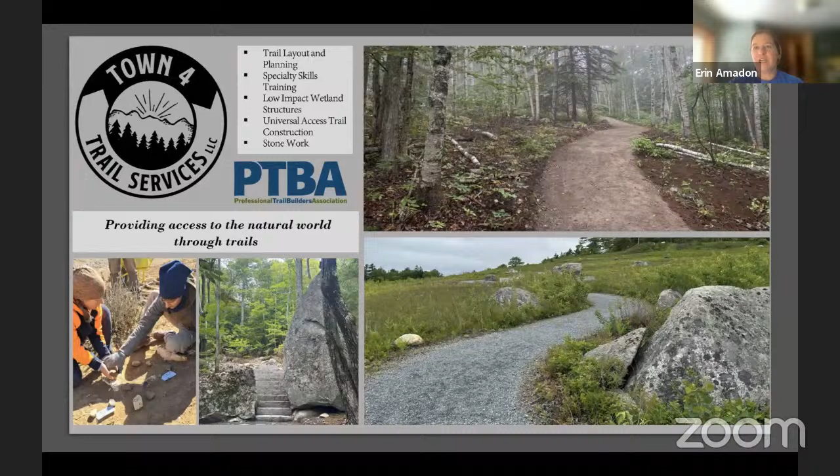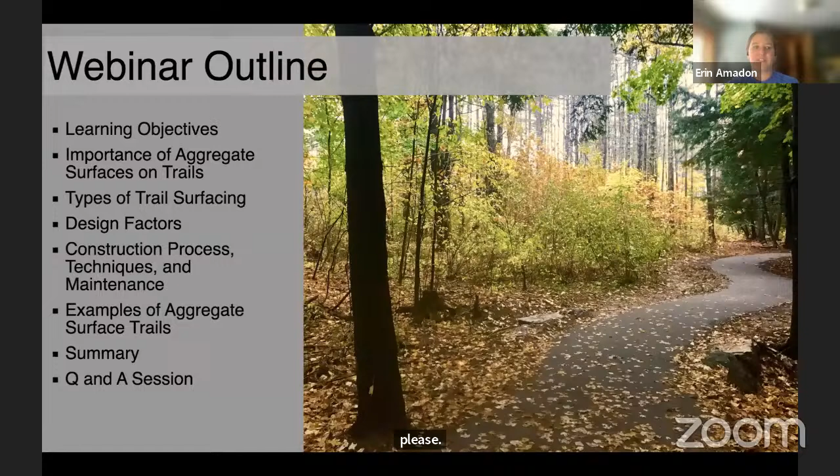Welcome everyone to our webinar on aggregate surface for trails. Today we'll explore the importance of these surfaces, the various types, key design factors, best practices for construction and maintenance. We'll also share some practical examples and wrap up with a question and answer session. There's a lot to cover, so I'm going to get started.

In this webinar, we'll look at different types of materials used for trail surfaces and their applications. We'll also talk about how things like slope, soil, and drainage matter when designing trails. Plus, we'll share tips for moving materials efficiently and explain why compaction is so important to ensure trail durability.

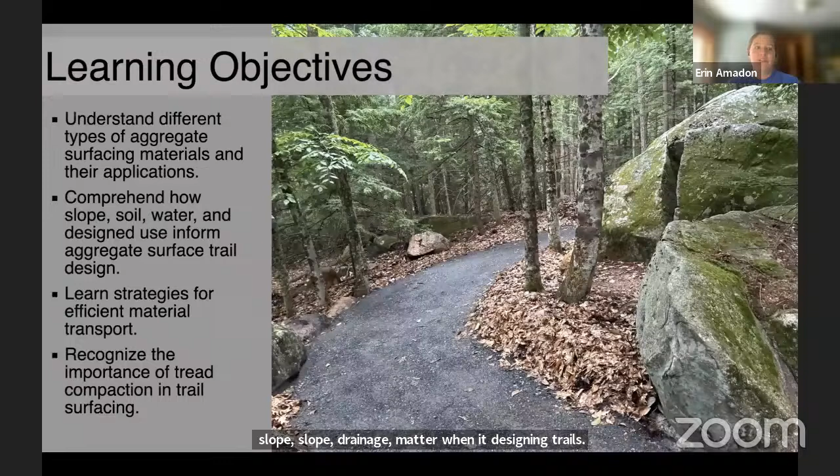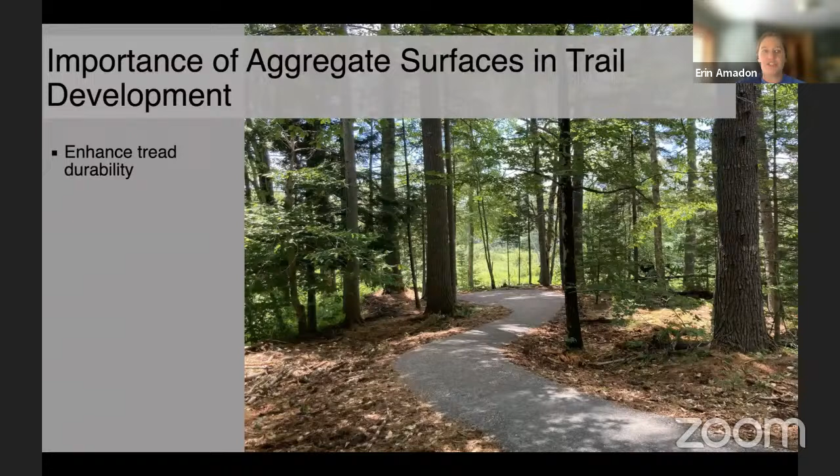So first, let's define what we mean by aggregate. Essentially, an aggregate refers to a granular material like sand, gravel, and crushed stone. These materials have a wide range of uses for trail construction. They can enhance tread durability by providing a firm and stable surface. They help resist erosion, reduce maintenance, and provide resilient surfaces that can reduce wear.

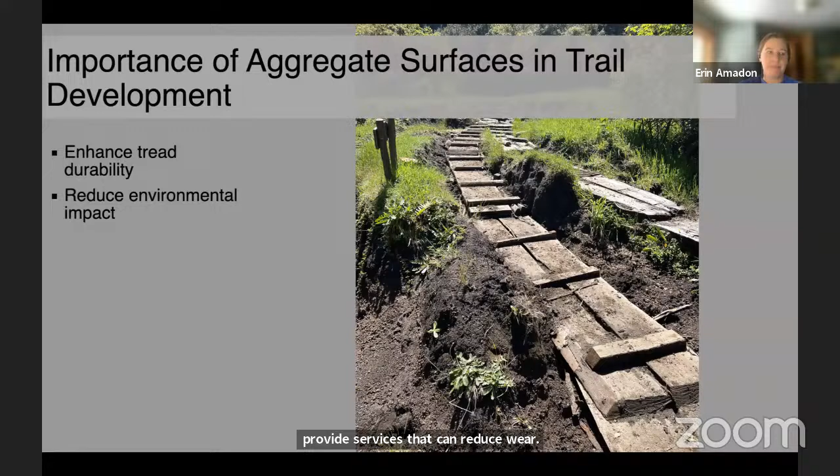They can reduce environmental impact by minimizing soil erosion, managing water runoff effectively, and preventing sedimentation. They can improve user experience by offering a smoother, more predictable path of travel, reducing tripping hazards, and providing a comfortable experience for users. Aggregate surfaces can play a critical role in creating a firm and stable surface to meet accessibility needs and standards.

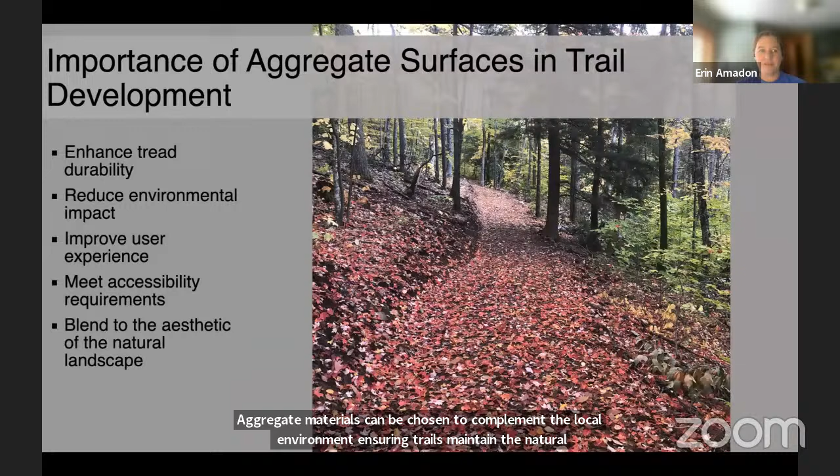Aggregate materials can be chosen to complement the local environment, ensuring trails maintain a natural appearance. You may be somewhat limited on coloration based on the parent material, availability, and pit locations, but typically you are sourcing that material as close to the job site as possible. If installed properly and with the appropriate sized aggregate, these trails can withstand diverse weather. These materials can allow for adequate drainage and resist formation of ruts, puddles, and mud. However, we should acknowledge there are some limitations to what they can withstand.

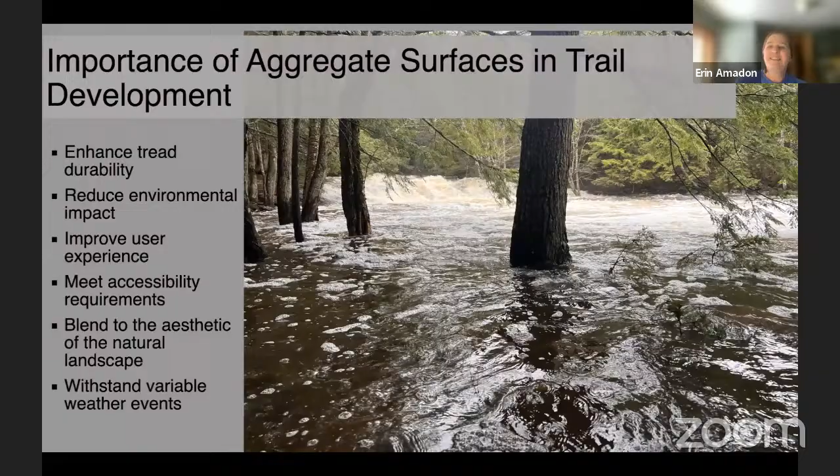Next slide, please. There are different types of aggregates used in general construction. Each type is used for a specific purpose depending on its properties and the need of the project.

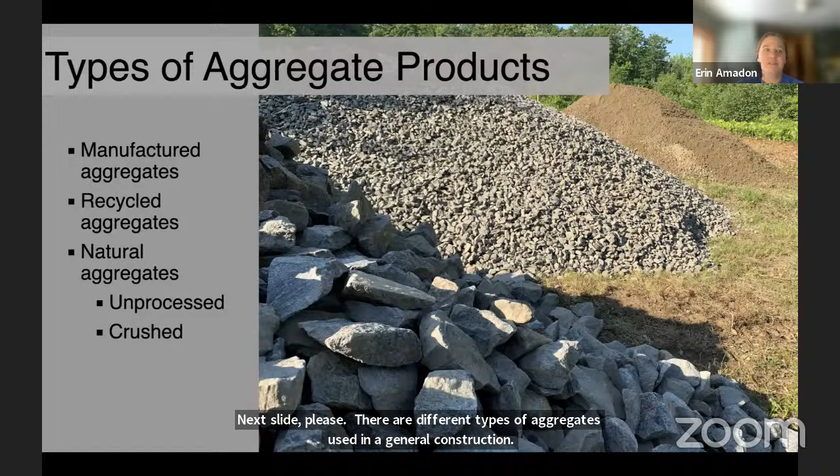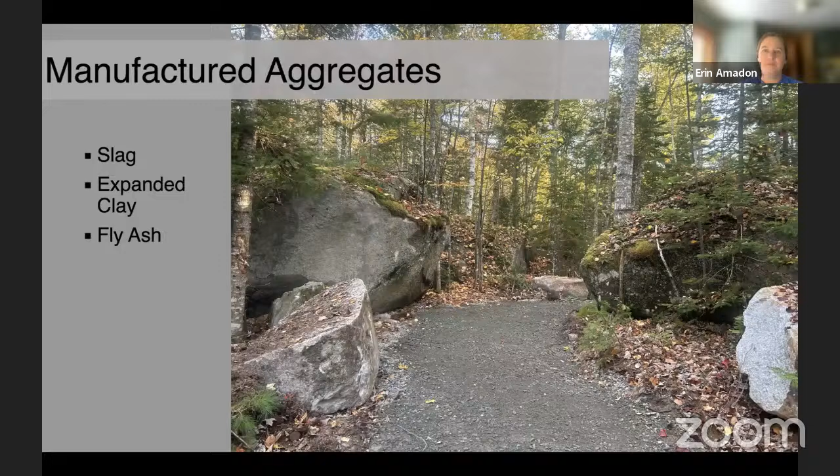We should mention that there are manufactured aggregates, because sometimes they're used in conjunction with other aggregates, but that's not going to be the main focus of our discussion today. There are also recycled aggregates out there, and using recycled aggregates can help minimize the environmental footprint by reducing raw material extraction and create a durable surface.

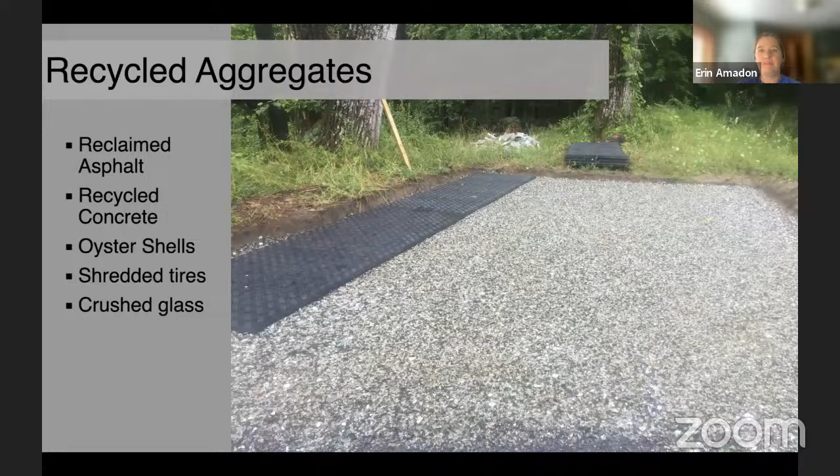Natural aggregates are unprocessed. They come straight from the earth without significant alteration. For example, you have bank run, which is a mix of sand, gravel, and stone, naturally deposited by rivers, often used as-is for foundational support. Sand is generally mixed in with other aggregates and is not typically used as a tread surface. River stone is known for its round edges and aesthetic appeal. It's often used in landscaping or for decorative finishes on the trail. Typically, we don't use it structurally.

Unscreened gravel has not been processed to separate by particle size. This type of gravel is often used as a basic fill for foundational layers where precise particle size is less critical. Screened gravel has been processed to separate particles, ensuring uniformity and consistency.

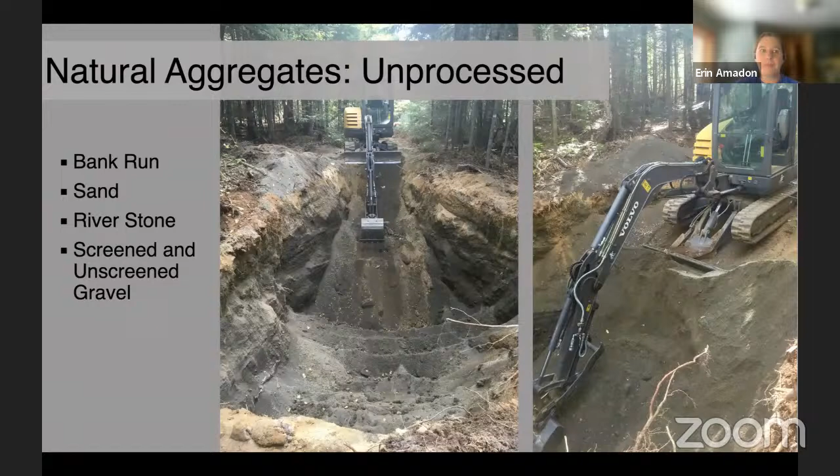Oftentimes, we'll take that unscreened gravel from a borrow pit and then transport it to our trail where needed. Typically this is done by 5-gallon bucket, dirt bags, or equipment. While this can be an essential part of a trail project, and sometimes cost-effective, it's not really going to be the primary focus of our discussion, but I wanted to make sure we mentioned it and acknowledged its use in trails.

All right, we're going to mainly focus on crushed aggregates. Crushed aggregates are made from larger stone or blasted from ledge that has been mechanically broken down into smaller angular pieces. The angular edges of the crushed aggregate lock together, and this can enhance its strength, resist movement, and help maintain durability over time. This is just a general list—every time you call a quarry, they're going to have a different name for the same product.

So to ensure that you're getting a consistent product and really getting what you want, you can ask for that gradation test report, or the sieve analysis. That sieve analysis is basically a method to determine the distribution of particle sizes in a sample of aggregate. The aggregate gets passed through a series of sieves with progressively smaller screen sizes, and the material that's retained is weighed and calculated to the percentages of the total sample it represents.

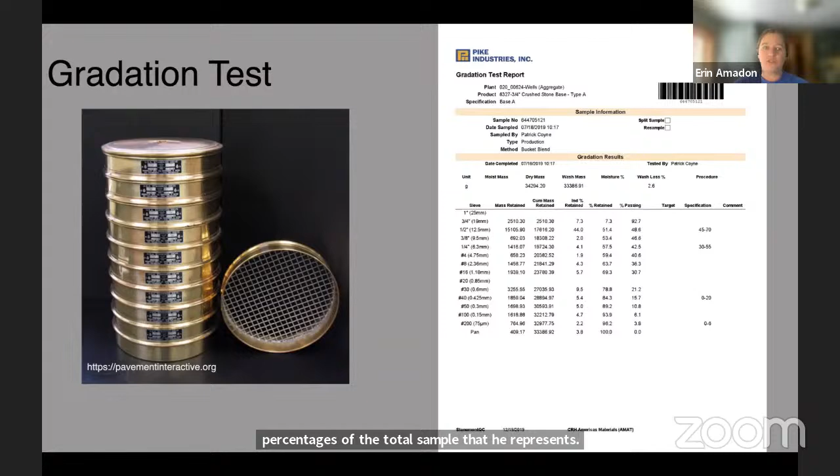When you order material from a quarry, you're either going to order it by the yard or the ton, and it's priced the same way, but it typically doesn't include trucking costs, so you want to take that into consideration.

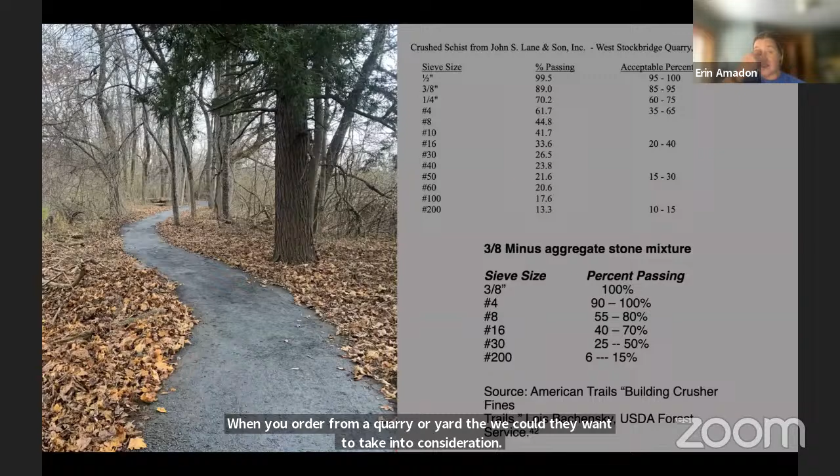Here are two different examples of sieve analysis that have worked well for accessible trail applications in the past, because they have the proper ratio of larger particle sizes to fines in order to achieve optimal compaction, stability, and surface drainage. When you're choosing an aggregate, it's important to consider things like its grading, durability, particle size, surface texture, abrasion and skid resistance, as well as absorption and surface moisture capacities.

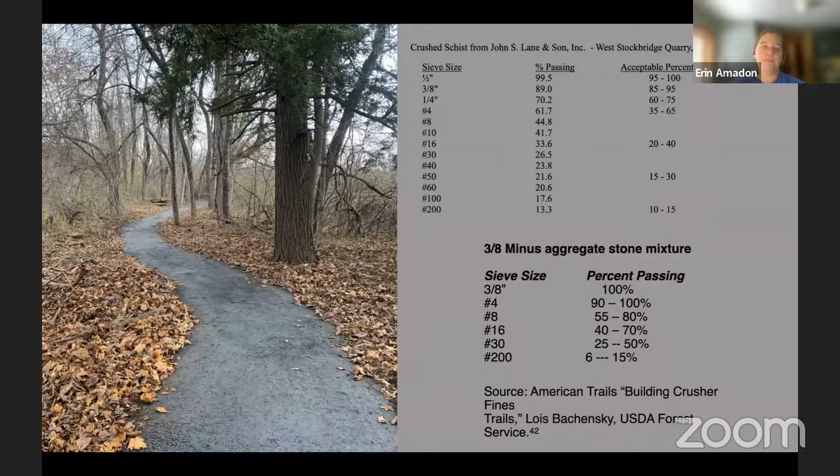Hold there for a second, Jen.

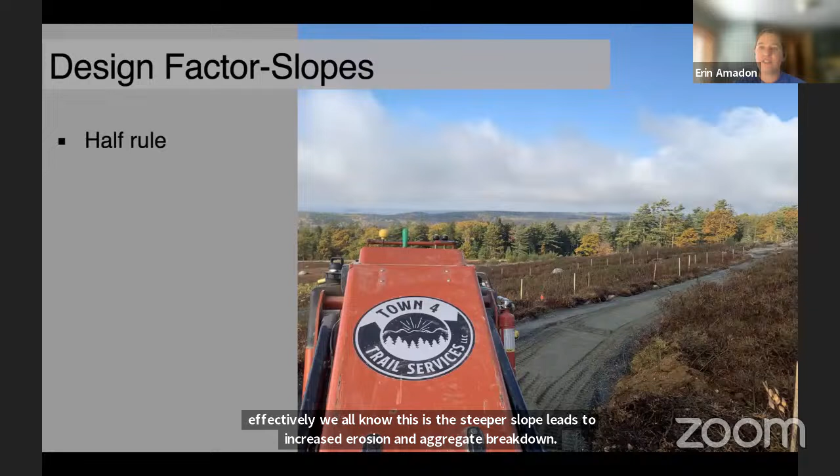One of the most important sustainable trail layout principles is how we address slope and grades to manage water effectively. We all know this, right? A steeper slope generally leads to increased erosion and aggregate breakdown, meaning that on a steeper slope, the aggregate surfacing material is more likely to be washed away due to increased water flow and force, requiring a design that better stabilizes the aggregate to help prevent erosion. Essentially, the steeper the slope, the more critical the design and quality of the aggregate surfacing becomes to maintain stability.

One of the ways that we can ensure we don't have too steep of a slope is by following that half rule in our design phase. This means that the trail grade should never be more than half the slope of the hillside. Another way we can look at that is thinking about trail slope alignment.

Thanks, Ted. So trail slope alignment can help us lead to a deeper understanding of how different slope alignments can affect trail durability and erosion.

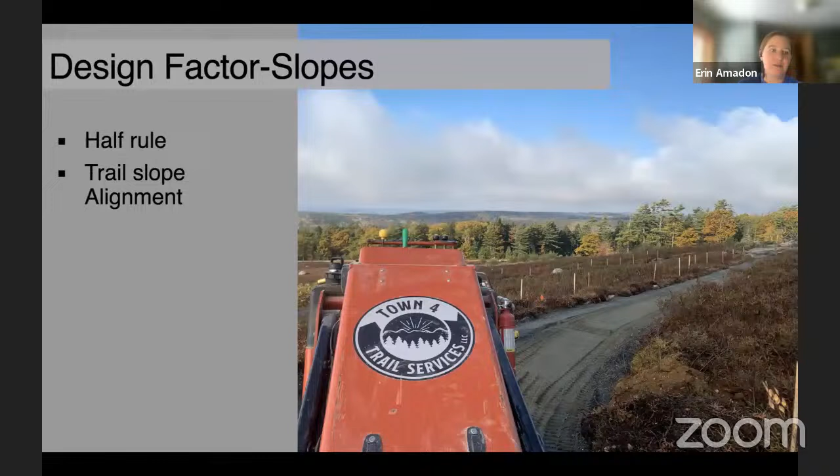Aggregate size and surface texture play a critical role in trail stability. Larger aggregate sizes are more resistant to erosion as they lock together better and stay in place. But smaller particles are more easily washed away by fast moving water. Additionally, the surface texture of the aggregate matters - rough textured particles create more friction, helping slow water down and reduce risk of erosion. But it's really that well-balanced mix of particle size and rough texture that can significantly enhance trail durability.

In areas with steeper slopes, aggregate surfacing can be used to stabilize the terrain and protect against erosion, often combined with other stabilization techniques though.

Mechanical wear happens from the interaction of how people use the trail and the trail surface itself. The more traffic, faster speeds, braking, turning, heavier surface to contact area, sudden grade changes, improper drainage, and wind a trail gets, the more wear and tear you'll see. Using an aggregate material can help reduce this mechanical wear.

Proper drainage structures - your grade reversals, grade dips, outsloping treadway, subterranean drainage - are all essential to help control water flow and prevent excessive erosion. Other design factors to keep in mind are things like your canopy cover; water dripping off of tree branches or kiosk roofs can add to wear and tear on the trail and should be considered when you're using an aggregate material.

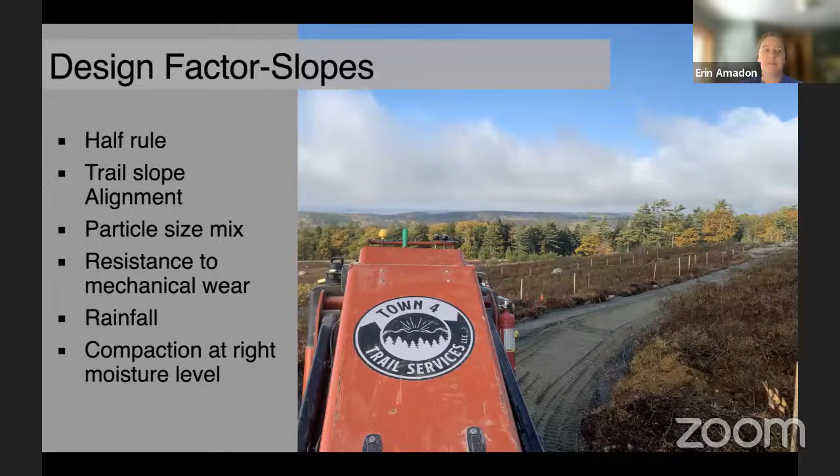All right, so soil conditions. First, it's important to note that I'm not a geotechnical engineer, but I am happy to share what I've picked up here and there with a lot of trial and error over 27 years of trail building experience. There is a lot of good information online about design loads, subgrade bearing capacity, load positioning for trails, and some of that information will be listed in the last slide.

Secondly, I wanted to give a shout out to the previous webinar, Basic Soil Mechanics for Trail Building with Alex Mann. Building off of that information, we're thinking about soil properties - things like texture and structure can really affect how well that aggregate sticks to the ground underneath. If the soil isn't stable or well structured, it can impact the overall stability of the trail. And so one of our considerations in soil conditions is that hillside hydrology, where that water table is and how that water moves through the landscape, are important factors into successful aggregate installation.

Properly accounting for your design load can ensure that the trail can handle the intended use without degrading too quickly. Design factors would include things like user, frequency, and other environmental conditions.

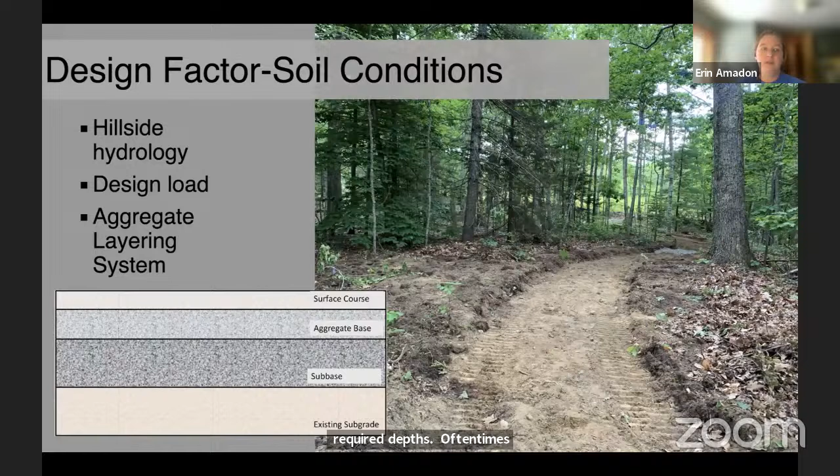So first and foremost, we want to maintain that natural drainage through our layout and design process.

And then we want to make sure that we're building a trail on a side slope to help maintain sheet flow, allowing water to move evenly across the surface. We also want to make sure that we are outsloping or crowning the tread to allow surface water to flow off the trail.

Most importantly is that subsurface drainage. It is key to maintaining the natural drainage of that hillside hydrology through the landscape. Oftentimes this can be done by a rock sandwich, a burrito, or a lasagna construction method. We like our food references in the trail world. A rock sandwich is usually sometimes fabric, depending on your sub base, then a 2-inch angular stone, compacted fabric, base, and then your surface course.

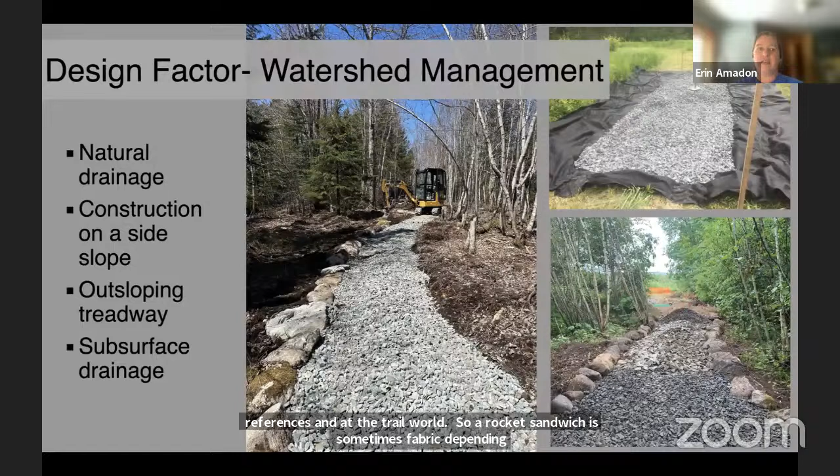The type of use on the aggregate trail has a big impact on its condition. For example, heavily used trails can experience more wear and more compaction, while foot traffic tends to be less of an impact. The more intense the use, the more frequent maintenance may be needed.

Aggregate materials, especially when properly compacted, help distribute the weight and reduce erosion, making them ideal for trails that see a lot of foot, bike, and horse traffic.

It's important to note that aggregate surfaces can be significantly affected by seasonal conditions, such as weather including rain and freeze-thaw cycles. High temperatures can alter the material's stability and durability. However, using aggregate surfacing can still be beneficial due to its cost effectiveness, ability to manage water, and flexibility in various climates.

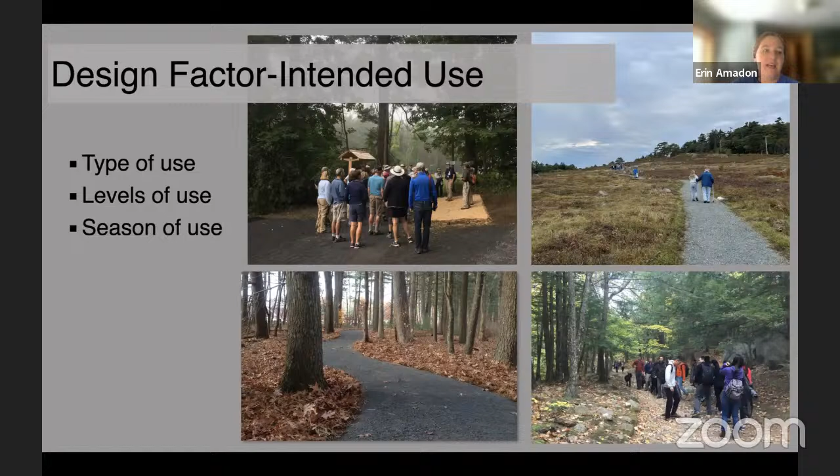And then last but not least, before I hand it over to Jed, linear grades and cross slopes are still important factors to ensure proper drainage and trail stability, which we mentioned earlier.

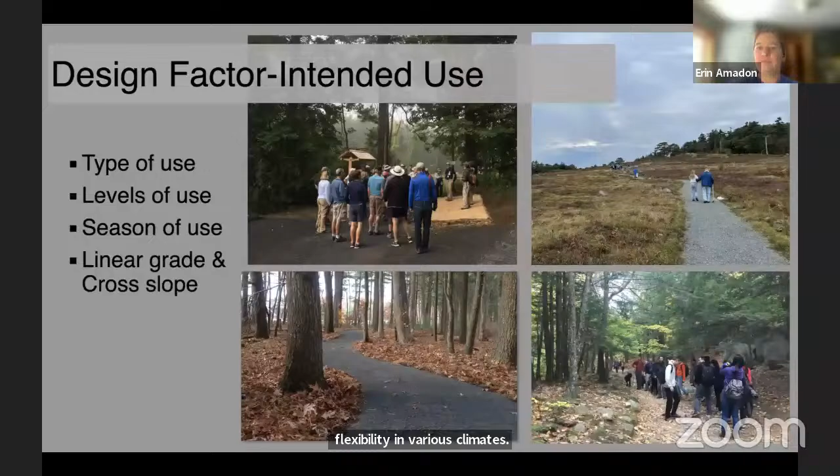All right, thanks Erin. I'm going to talk for the next 20 or so slides about the construction process. The idea is by presenting the proper techniques and showing the construction sequence of a typical multi-use aggregate surface trail, a lot of the questions about what to do and what not to do will kind of be covered.

So, equipment. Although it's possible to build aggregate surface trails with simply an ATV and a dump trailer, having the most appropriate equipment makes a huge difference. We generally use track machines that are no wider than the finished tread, and sometimes considerably narrower, except for some occasional compactors and wheeled loaders.

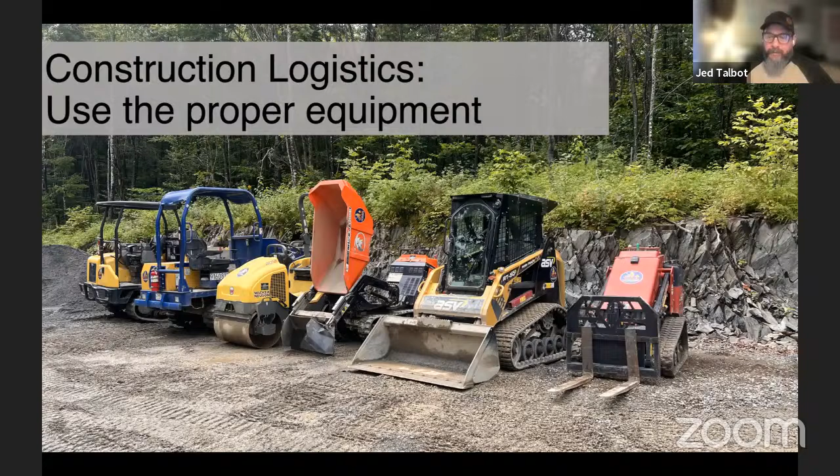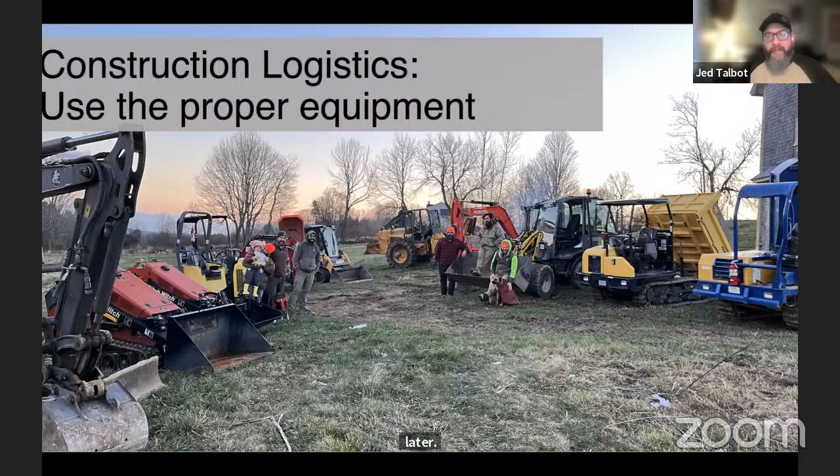Without going too deeply into the specifics, because this isn't really a mechanized webinar, we use mini skid steers for grading, larger skid steers for loading, tracked carriers of various sizes for hauling and dumping, getting that stuff way back out into the woods sometimes, and drum and plate rollers for compacting. We'll talk about those more a little later. We also use excavators for, believe it or not, excavating. It's not uncommon to have as many machines on a project as we have members, or dogs or kids.

So the construction process. First thing we do - I'm going to skip over the design and layout elements for the sake of time, and assume that the trail has been marked out according to some of the design guidelines that Aaron was outlining earlier. The first step is to prepare the trail bed.

Do that by clearing the corridor and removing as much vegetation as possible prior to the excavation. We usually blow or rake the leaf litter outside of the excavation zone, and pile it or windrow it neatly so that we can reuse it again in the soil stabilization and naturalization phase, one of the last things we do before finishing a trail.

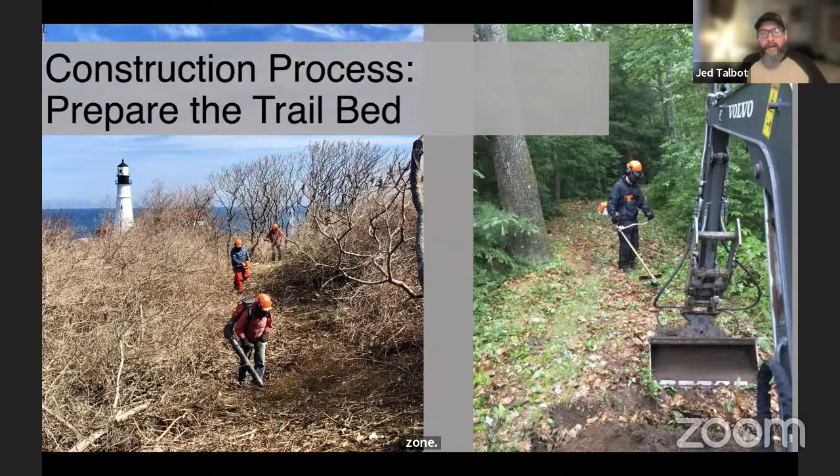Sometimes when we're building through fields or areas with a solid vegetative root mat, we'll use a power box rake, often referred to as a Harley rake, to masticate the soil and churn it up into a nice loamy mix. That makes everything a lot cleaner, keeps the seed source in the organics on the edges of the trail. You can also use a rototiller, but we find that a power box rake works really well.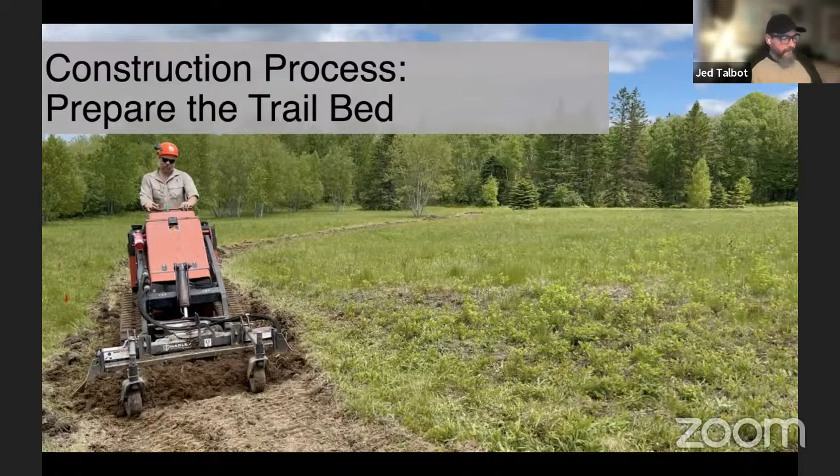Then we start the excavation process, where we excavate to the depth of the finished trail tread and remove the organics as neatly as possible, paying close attention to a bunch of things, like looking at grades and the final elevation of the trail.

Sometimes people will put grade stakes with elevations on them during this process or directly after. We're looking at the depth of excavation, where the organic layer meets the mineral soil layer, and also hydrology.

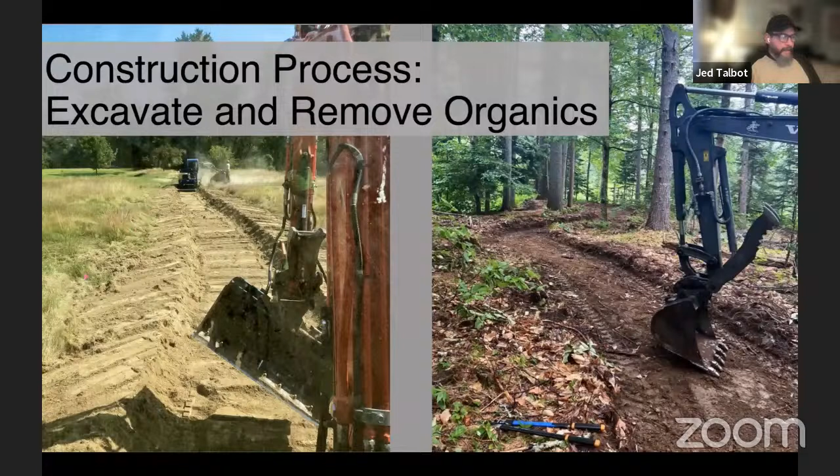We should be thinking about how the tread will shed water, generally either crowned, insloped, or outsloped, and visualize where the water is going to go and how we'll be moving it as it comes onto the trail bed and as it exits during the excavation process. You really want to wrap your head around how you're going to manage the water as you're excavating the trail, and that continues throughout the rest of the processes.

Generally, we try to utilize every stick, leaf, and blade of grass. Everything's a resource, and we use it as much as possible.

But sometimes there's an excess of excavated organic material, rocks, or, really commonly for us in the Northeast, rocks and stumps. We're digging up way more of those than we can reuse. They're a little unsightly, so we don't just throw them off to the side, generally speaking, but we haul them out of the immediate view shed of the trail. Sometimes they're dispersed or piled on site, and sometimes they end up getting hauled off. It does take a considerable amount of time to remove the organic material from the trail bed, but it's not a step that we forego.

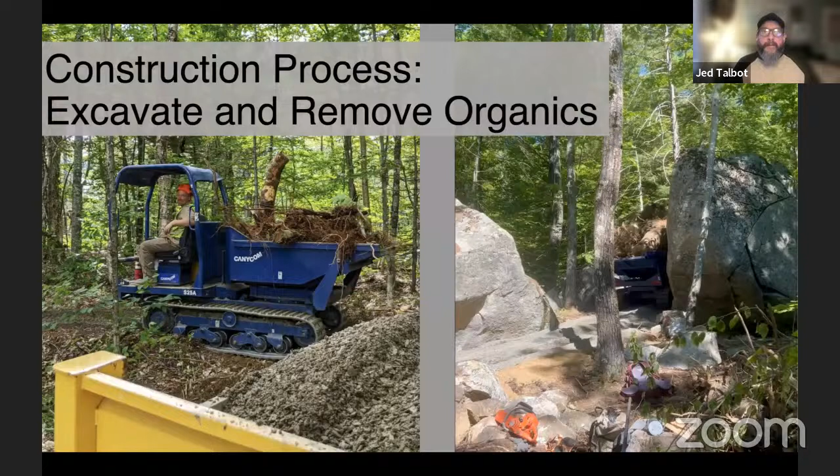Then we start to analyze and construct our water relief structures. Water relief structures include rolling grade dips, grade reversals, culverts, boardwalks, swales, etc. They should all be planned out while you're excavating the tread. The variety of water relief structures is considerable and varies according to the type of trail and the user.

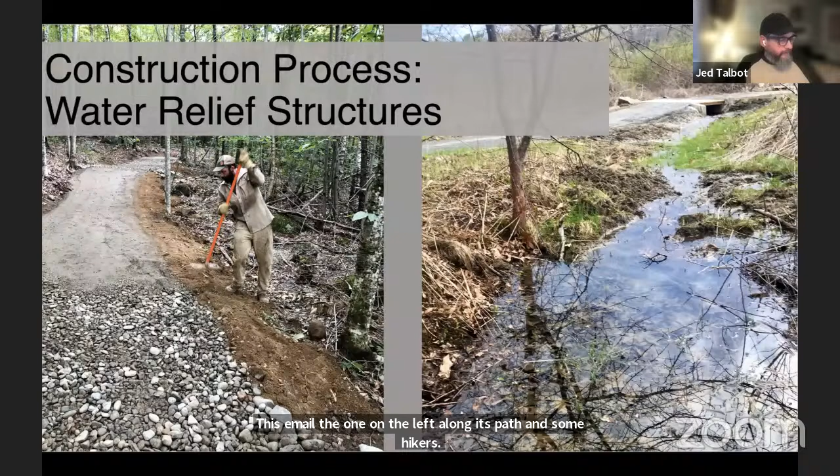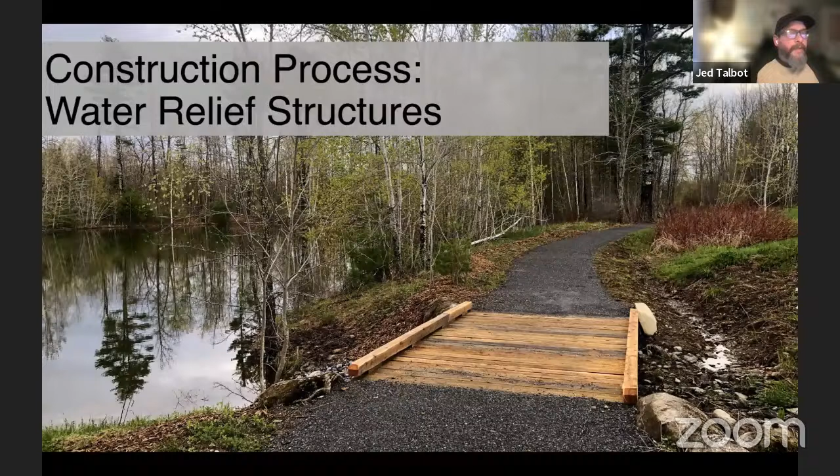So this is the type of stuff we really want to consider before we actually start throwing gravel on the ground. We also utilize traditional double wall plastic culverts at times.

When we do, it's important to sculpt the inlet and the outlet to channel water to the culvert with off-trail ditches and swales, and slow the water down after it leaves the culvert, either with riprap, large woody debris, or level spreader sediment pools. There's a number of ways to slow that water down after it leaves your culvert.

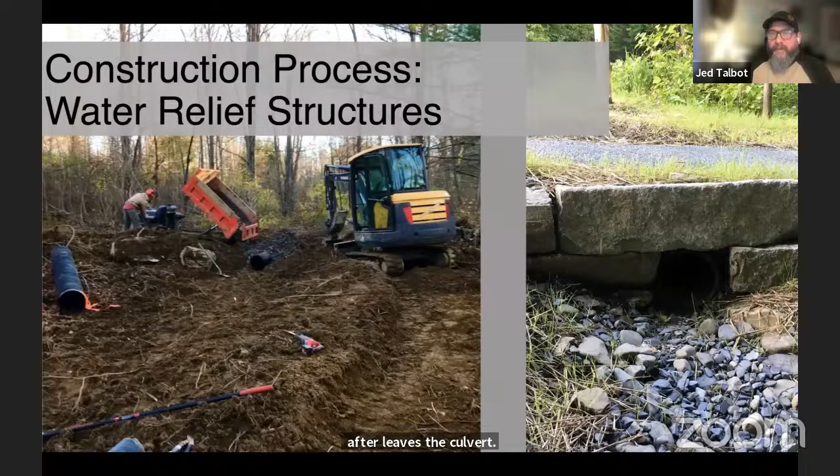The wing walls around the culvert should be retained with rock or timber, and a cap should be placed over the culvert with a minimum of 12 inches of cover. We like to hide our culverts from view with well-placed stones for aesthetic reasons. It's not necessarily functional, but I personally appreciate hiding those plastic culverts as much as possible on a trail.

Then we have to identify and fill the sub-base areas. The sub-base, like Aaron was talking about on a previous slide, I'm loosely calling sub-base, referring to drainage stone, whether it's crushed or screened, that allows water to pass through the trail. So we often use 1.5 inch stone, which is what you see in the photos here. But sometimes it's 3/4 inch rock, and sometimes larger aggregate. Sometimes we'll have 3 or 4 or 5 different sizes of aggregate that we're using in different places, depending on the need.

If subbase is being installed over saturated soils, we should put geotextile fabric down underneath that stone. Fabric is always placed on top of the stone. We'll talk about that a little bit more in a minute. Aaron referred to that as a rock sandwich.

Exactly where and when to install subbase, where it's needed and where you don't need it, is kind of difficult to generalize. But as a point, we always install a subbase of drainage stone anywhere there's exposed ledge or bedrock, because groundwater generally percolates until it comes down and hits that ledge, and then it moves on top of that ledge. If you're excavating your trail down to the ledge, the water will easily wash out gravel really quickly if you don't give it a way to pass underneath your trail.

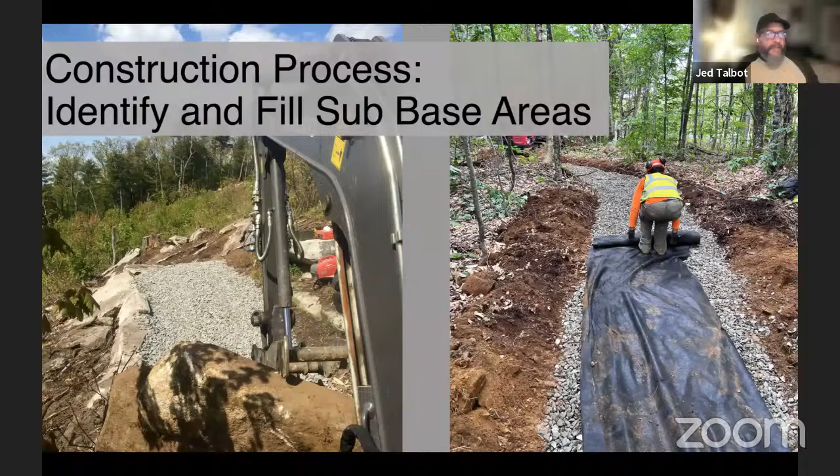So in terms of geotextile fabric, we use geotextiles between our subbase and our base layers. We don't often use them between our base and our surfacing layer, but sometimes there's a reason to. We prefer to use for trails a non-woven fabric, which means it's perforated, like needle punched, not like the plastic type you see on roads. It resembles felt, and we usually use the 4-ounce weight.

The manufacturer that we prefer to use, or the standard we like to use, is Mirafi 140N, or equivalent. That's the specification we like.

Geotextiles are really important because they serve 3 main functions: they act as a filter, a separator, and a stabilizer. As a filter, it allows water to pass through but not sediment - really important. As a separator, it keeps soil and aggregate of different types from mixing. If your subbase drainage stone is getting clogged with fines, it will cease to function, so it's really important. As a stabilizer, it gives more structural integrity to the soils and surrounding aggregates around it.

One thing we don't often talk about with geotextile fabric is that it also serves, to a degree, as a weed barrier. That can be really important when you're building trails through fields, like the environment we're seeing in this photo. But enough about geotextiles for a minute, let's talk about filling our trails.

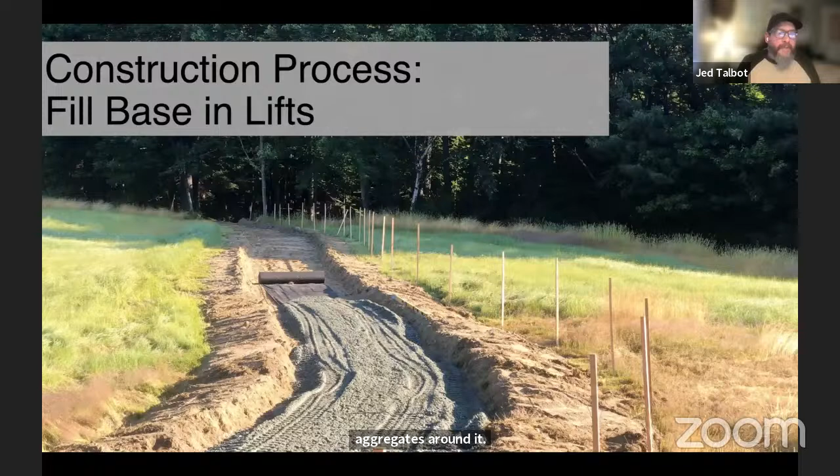We fill our aggregate surface trails, our base, in lifts or layers. So in order to achieve adequate compaction rates, we want the thickness of each layer before we compact to be about 4 to 6 inches.

You don't want to fill the entire depth at once because you won't be able to get those bottom few inches compact enough so that they won't settle down over time. And a question we get a lot, and it's a really important one, is how thick or deep do we want our aggregate surface trails to be?

Personally, I often see projects where you're seeing the absolute minimum - 2, 3, 5, 6 inches of aggregate on an aggregate surface trail - and they generally need maintenance within a few years. You start to see that fabric popping up through as things move.

So we generally shoot for a minimum of 8 to 12 inches of thickness total, between your base and your surfacing layers - that's excluding your subbase. And we often exceed that; we're often at 14 to 16 inches. A lot of that depends on the depth of your organic soil, and how much you need to build up to get proper drainage given the terrain restrictions that you have.

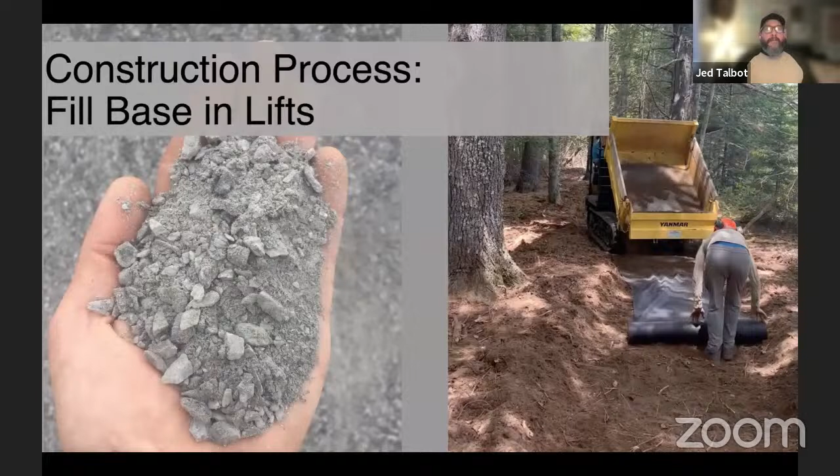We sometimes also use heavier plate compactors that have forward and reverse motion.

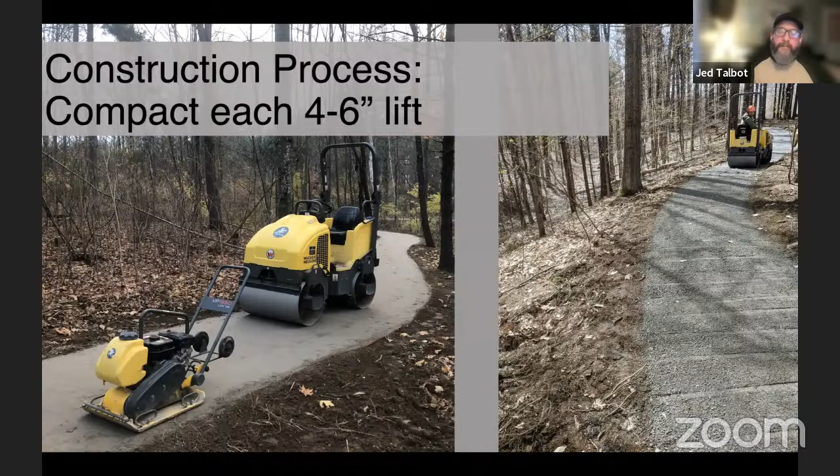Particularly with your final compaction, but also with each tier you compact, moisture is essential. Water creates that ionic charge that attracts particles together. It's essential to have stuff stick, and you need it to stick together instead of displacing in order to achieve your compaction rates. So that can be tricky sometimes.

We often end up leaving a compactor or two on site even after we demobilize from a project, so that we wait until those nice soaking gentle rainstorms happen, and go compact after that.

As Aaron alluded to, you don't want to compact when it's too wet either. If you're using a plate compactor and you're starting to see the surface turn into mud, or stuff starting to bubble up, it's too wet to compact, and you're also doing yourself a disservice. So you want to try to hit that sweet spot.

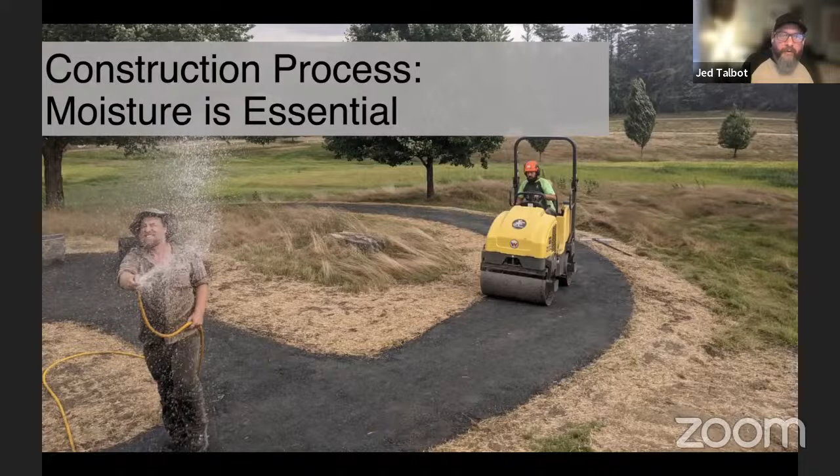And sometimes nature's not conducive to our construction deadlines, so we have to augment with water that we bring in. This picture actually, we were pumping water from a nearby pond and bringing it in, putting it in a vehicle, and adding water that way in order to get our compaction rates to what we needed to be.

So our top coat, or our surfacing layer, as Aaron labeled it earlier in the slide, is the next thing that we add if needed. We generally install a top coat of a slightly different aggregate when we're building accessible trails.

We have some specific recipes that we prefer to use for accessible trails that work really well, but that changes with where you are geographically and what you have access to in terms of quarries and how far you can truck stuff. So I'm not going to make any specific claims of exactly what should be used or what shouldn't, but your top coat is the last thing to go on if you're doing an accessible trail.

Usually that top coat wants to be 2 to 4 inches thick, and that's a really good thickness. You can go a little heavier, you can go a little lighter, but usually we shoot for that 2 to 4 inches of thickness for our top coat. And again, just a nice shot of needing the moisture to compact.

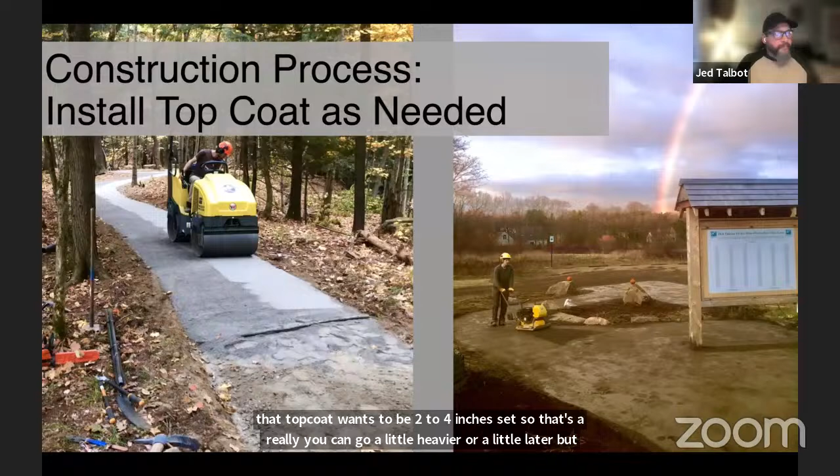Next, we finish our edges and we naturalize. This is a step that is very time and labor consuming, and adds to the cost of a trail significantly, but it's critical to not only aesthetics, but the function of how a trail works. Just throwing gravel on the ground is not going to allow water to move across it the way we need it to. So what we do is we hand finish the edges when we naturalize.

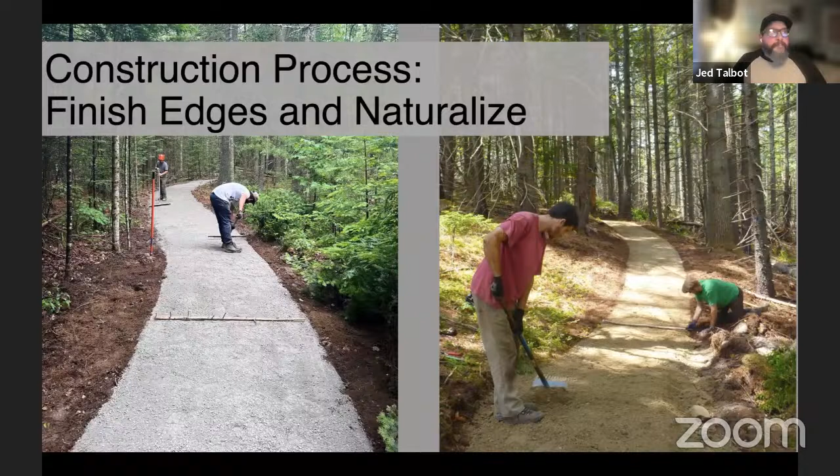We stabilize our soils, sometimes seeding and mulching. We don't always have to seed and mulch, depending on where we are, and some clients don't want to import any seed source at all. Sometimes there's plenty of seed source in the excavated organic material on the edges. But as needed, we stabilize our soils, we seed, we mulch. Basically, anything that we disturb, we stabilize, and we try to stabilize that day, if not that day, certainly before any rain events.

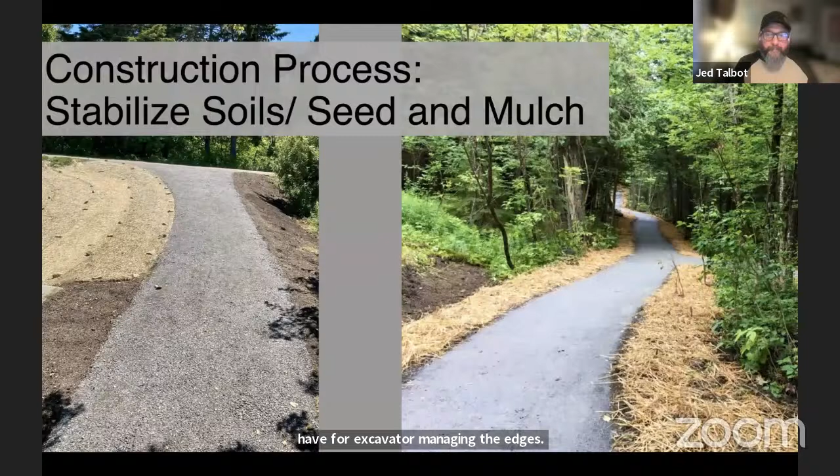So that's it for the construction piece. We'll get into a little bit of some of the more common maintenance issues and things you can plan on if you're going to construct an aggregate trail.

Thanks, Jed. I think a lot of times there's this illusion that aggregate surface trails don't need maintenance, but that's just an illusion. They do require maintenance, and we're going to go through a couple of slides that show typical things we see on a trail. The main one is clearing and cleaning, which involves removing debris, fallen branches, and some of that leaf litter.

Do be careful when you use a leaf blower, because you don't want to remove all those fines. Essentially you can just turn on the leaf blower, no throttle needed, and let those leaves get blown off the trail without removing any fines. You don't want to do it when the trail's too dry, and be careful that you don't create a berm along the edge of the trail when you leaf blow and clean it.

Next slide please, Jed. So this is the same trail - the picture on the left is just after construction, and the picture on the right is a year later. It just shows how much vegetation can grow into the trail.

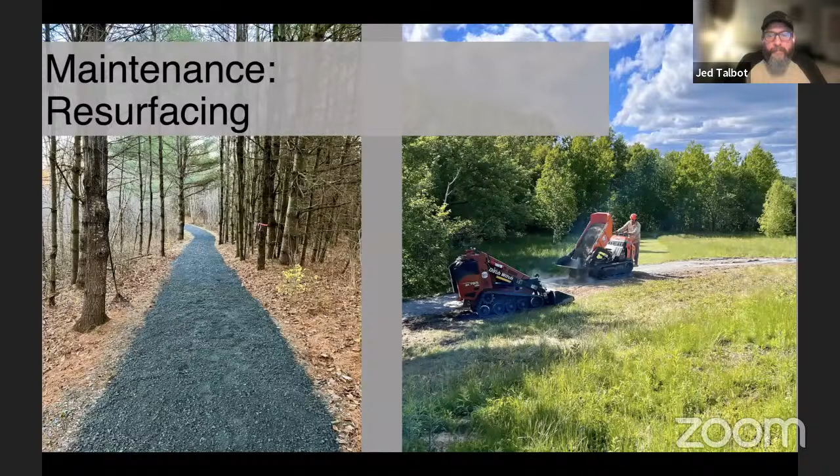And then before compacting, with compacting that went really quickly also. As much as we would love to say we build trails perfectly the first time and analyze the drainage and watersheds exactly the way we anticipated, you're going to probably have to go back and do some stuff.

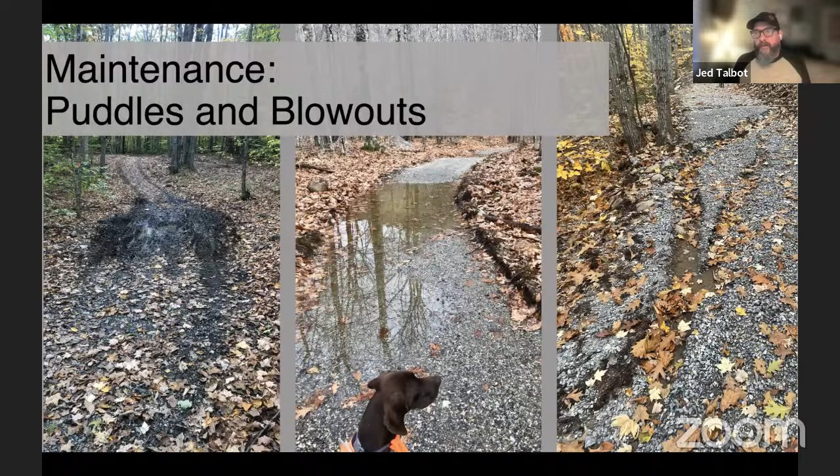Sometimes that involves modification and retrofitting, like adding box culverts. This is an example of a trail where we built it and then they changed the parking lot, so after we left, the parking lot started shedding water and we had to get the water across the trail. It was a new influx. The same thing can happen with harvesting or logging operations after you construct a trail. Hydrology is dynamic, it moves, things change. Water changes the way it moves across the landscape pretty frequently.

So now we've got a little bit of time. How are we doing, Aaryn? We've got a few examples of aggregate surface trails, we can just gloss over them really quickly to get to a Q&A. Yeah, that'd be great, there's a lot of questions. Okay, we have 12 minutes left. All right, well how about we just go through photos and mention the projects really quickly, and then get to questions, 10 minutes of questions? Perfect, okay.

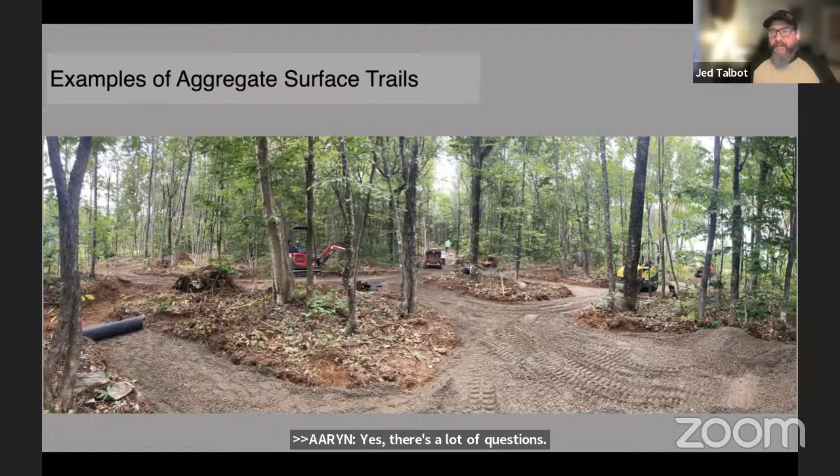This is an example of a trail that was built at Tongue Mountain Visitor Center at Katahdin Area Woods and Waters in Maine that we constructed. Just keep flipping through. This trail had high use, it was a connector trail, and it's very popular year-round.

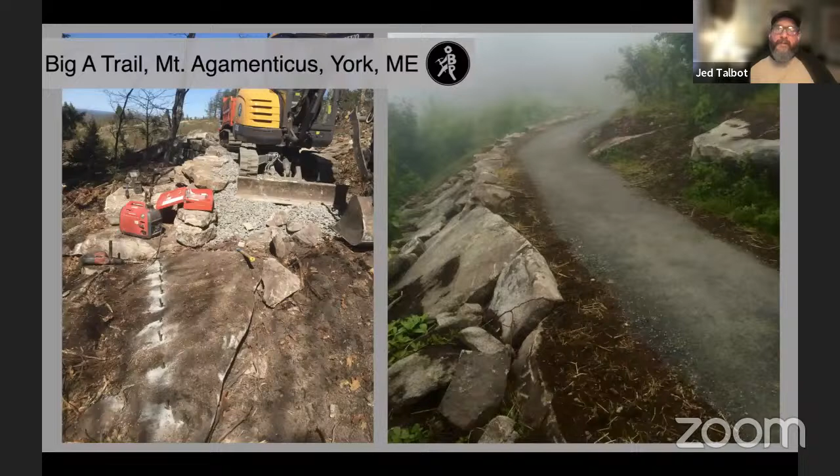We were talking about building over ledge. This is a trail that circumnavigates the summit of a big granite dome, Mount Agamenticus in York, Maine, and we're basically building over ledge the entire time. So we had to build up with a lot of walls and put a lot of crush in, and remove a lot of ledge in order to get the trail in.

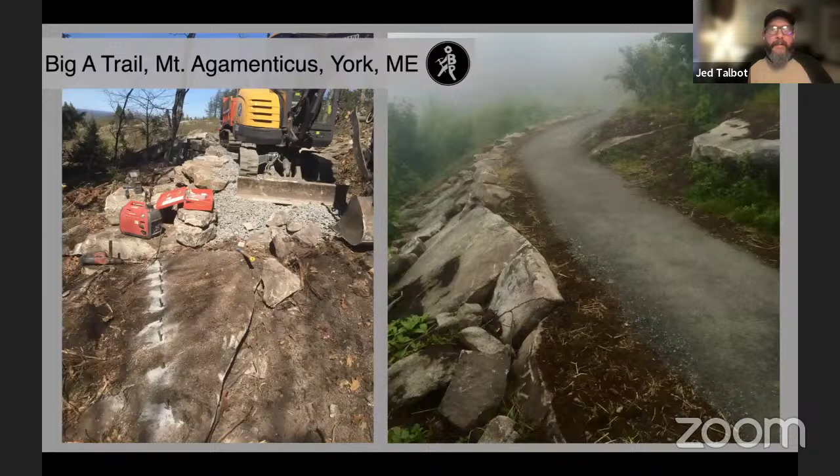All right, so again, we had lessons on each one of those, but we want to get to your questions. I think it's really important, but I'll just talk about some key takeaways before I get to the questions.

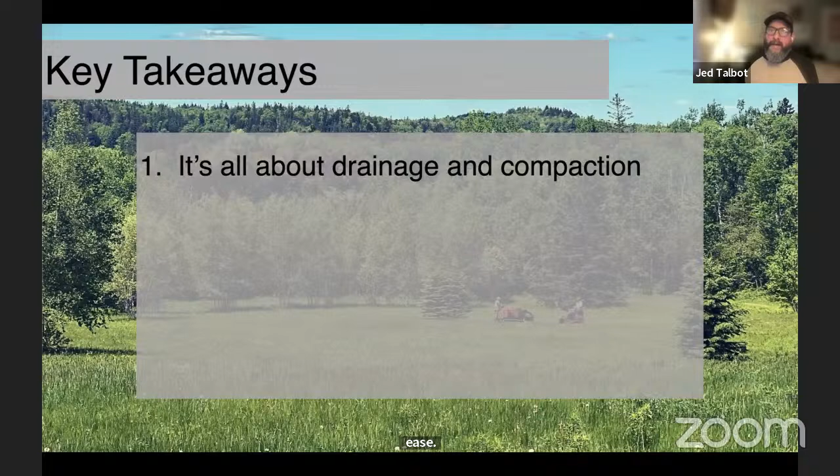It's all about drainage and compaction, if you haven't figured it out. Figure out where your water's flowing, where it needs to flow. Really focus on that. Water can blow out the best built aggregate surface trail very, very quickly.

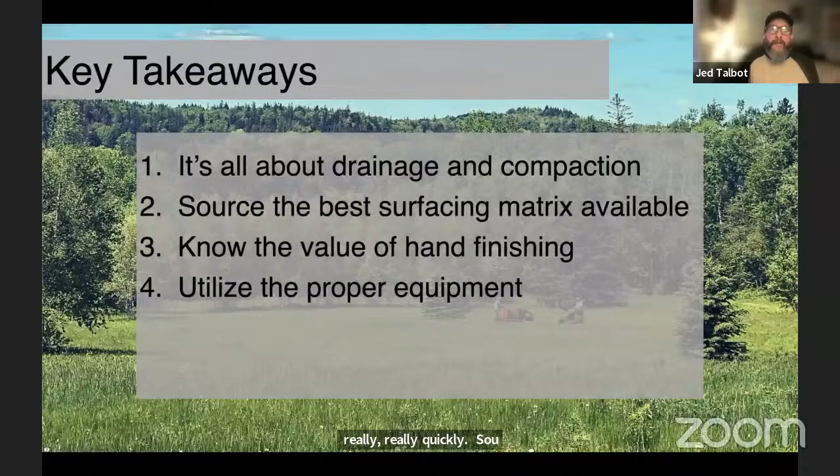Source the best surfacing matrix available to you. Know the value of hand finishing, because it really does affect the way that your trail sheds water over time. Utilize the proper equipment. Beware your shoulder seasons. Try not to build too early in the spring or too late in the fall, if at all possible, with gravel surface trails.

And if you go into it planning on maintenance, don't think that they're maintenance-free trails. You could drastically reduce the amount of maintenance that's needed, but you've got to do stuff every year.

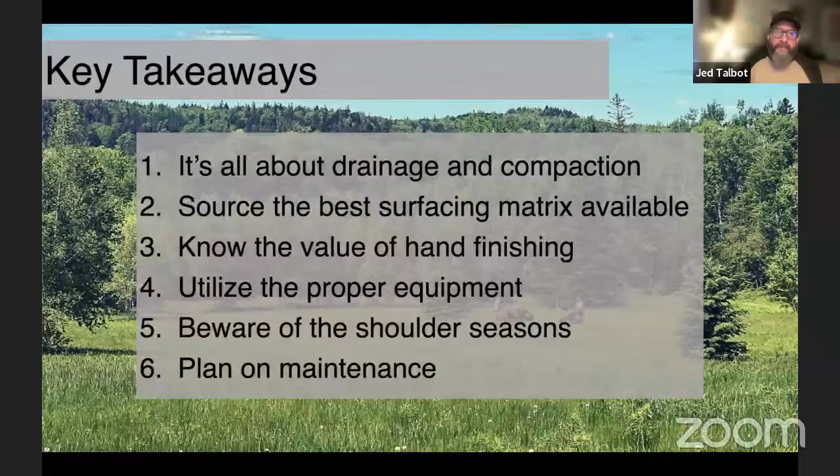So there's quite a few asking about when you're doing aggregate surface trails for different users, and if there's specific practices or construction techniques that you use, specifically for equestrian and then motorized. Those were two of the questions, or a lot of the questions.